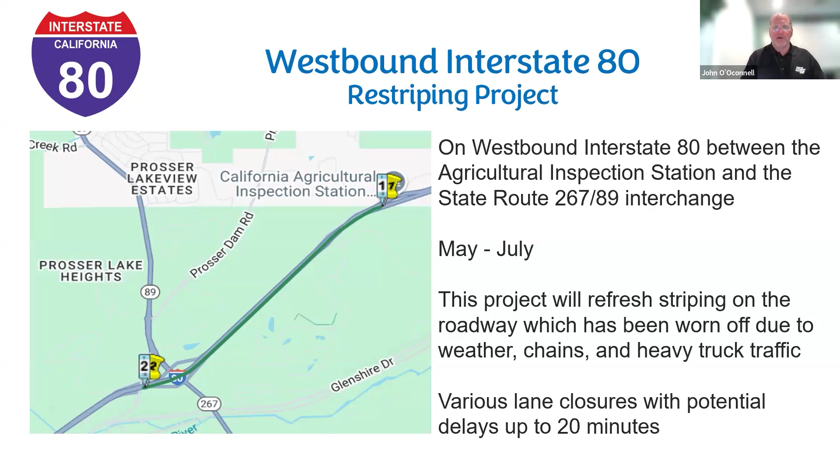All right, go ahead Jeremy, go to the next one. Okay, so let's go over to the Tahoe Basin now, where all the action is, especially Highway 28.

This will be kind of the star of the show this year: the Middle Mile Broadband Project, which started last year and is going to finish up this summer. In fact, they just started today with some prep work for it, so you might see them out there today and throughout this week.

This is Teichert Construction doing this work, part of a statewide initiative bringing high-speed internet into more rural communities. A lot of rural state highways are dealing with this this summer, so it's not just Tahoe. This project runs between Tahoe City and 267 in Kings Beach, but it's actually going to go all the way to the state line, which is the next slide.

This is starting now, about 50% done. They're working in the eastbound direction, and there'll be multiple locations with potential delays of up to 30 minutes. If you experienced it last summer, it's going to happen again this summer, same kind of thing.

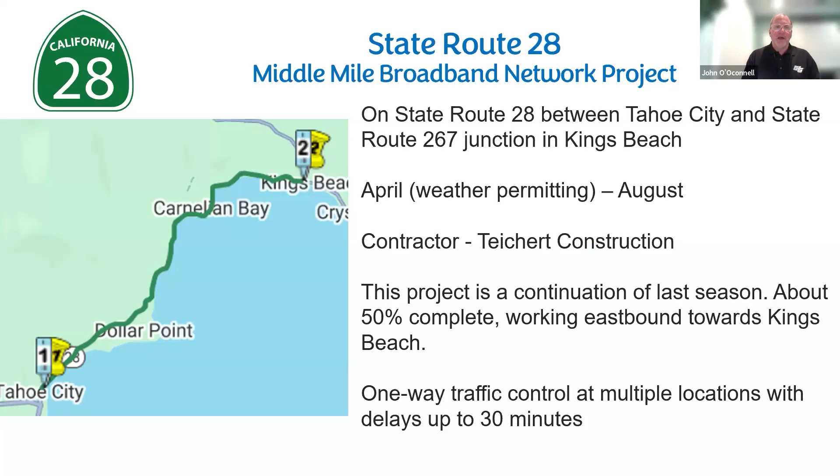This is the continuation of it, with a different contractor, which is why I separated them. This is Arcadian. It's going to pick it up from 267 in Kings Beach and go to Crystal Bay at the state line, just that small section. They haven't started this yet, so they're probably going to start early May and go to August.

This is always weather permitting too. If we get some freak snowstorm, that's going to halt things a little bit, or if we get thunderstorms, as we often do in the spring and summer up there. But it's supposed to start early May and go to the state line, with traffic control at various locations and potential delays of up to 30 minutes depending on the time of day and how much traffic there is.

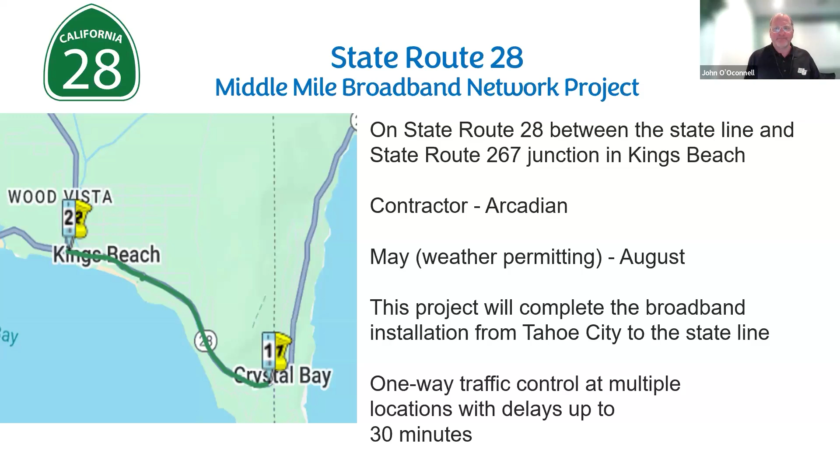All right, the one we've all been waiting for. Once the broadband is done, we are going to start basically repaving 28 from one end to the other, from Tahoe City to Kings Beach, all the way to the state line. This is supposed to start early May, so this will come behind the broadband.

The section in Tahoe City is going to be, I'm not going to sugarcoat it, a pain, because we have to dig it out all the way — the road is so damaged that we have to do what are called complete dig-outs, all the way down to the very foundation, the dirt, and rebuild the highway from the bottom up, just in Tahoe City.

We're going to do that in various sections, so it won't all be going on at the same time. This is going to start early May as well, and we're hoping to do the Tahoe City part first before the tourism season really gets going. So Tahoe City is going to be kind of rough come May, Memorial Day into June, hopefully out of there by the end of June.

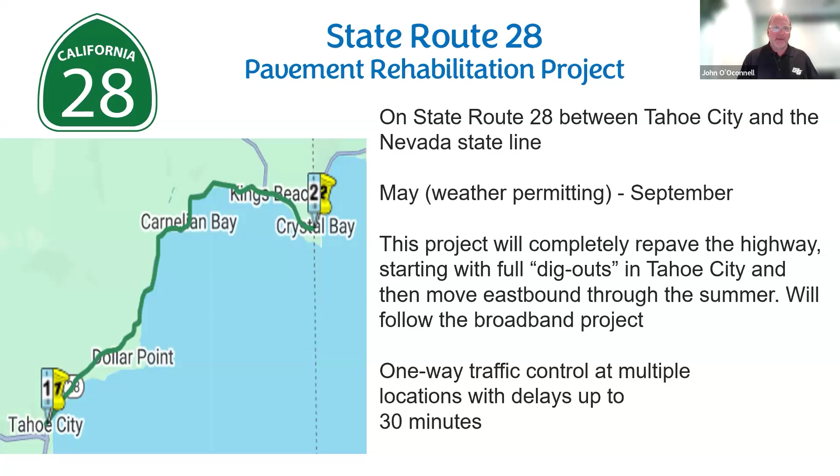That's the goal. The rest of 28 will just be a simple mill and overlay repave from there out to the state line. Tahoe City is the most complex spot, not just because of what we're doing, but because of all the shops, restaurants, and businesses there. I'll get to more details of how you guys can keep up with that, but expect delays — it's going to be kind of messy, to be honest, for about six weeks in Tahoe City.

This is going to start, I think, next week, again weather permitting, and go as long as they can before it starts snowing next winter, so through November, and then pick it up again in '26 — high-speed internet along the West Shore. Again, potential traffic control delays of up to 30 minutes.

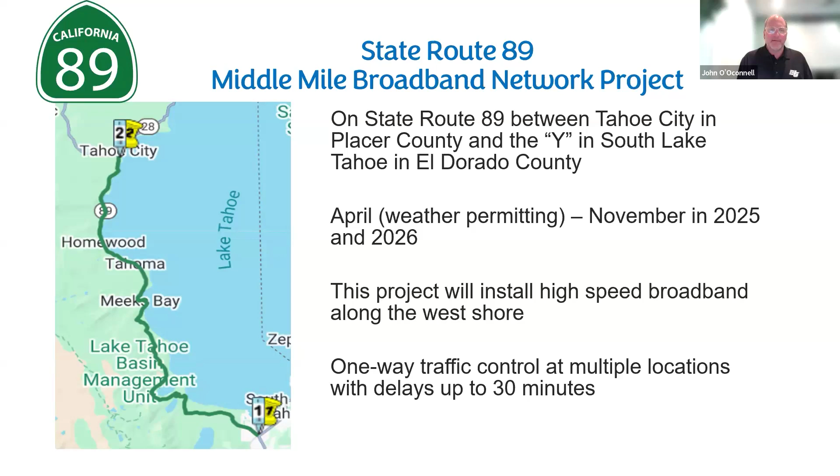And it's also going north. So this is out of Truckee going north up to Sierra County. Same routine, potential 30-minute delays in various spots, going all the way up to the Plumas County line, starting next week, and then going through the summer and fall, and then picking up again next year.

This part of 89 is not as heavily traveled as the Tahoe Basin, so hopefully traffic will not be as bad or as affected on this route because it's a little more rural, and it's not the Tahoe Basin. All right, go ahead and go to the next one.

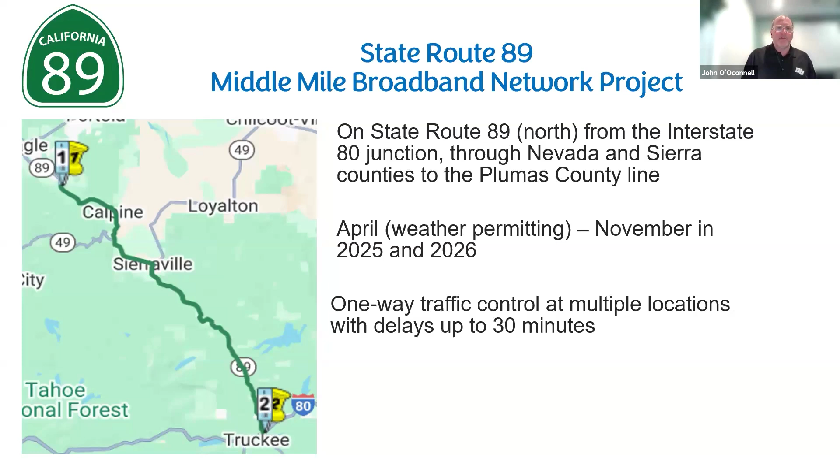All right, back to Tahoe City. There's another major project that's going to be occurring later this summer, and we are going to replace the Fanny Bridge, which I believe is about 100 years old. So just the bridge there across the river is going to get basically rebuilt.

Prep work will start in June. So a lot of the pilings and all this stuff underneath the bridge will get done first. So that won't affect traffic. But the full closure is expected to begin August 11th. That's what it's scheduled for as of now. It'll be about 12 weeks. So end of summer, kind of towards the tag end of tourism season, this is when this will start.

And traffic will be shifted over to the new-ish Lake Boulevard bypass. Hopefully this will not be as traffic interfering as the paving project, because people can simply take that other way around there. But probably the first week will be a little rough because people may not be aware, that's why we're doing outreach to try and get the word out. But some people probably won't know what's going on. But you can take that bypass up to Truckee or take it to 28 and go to Kings Beach, Tahoe Vista from there. And just the bridge will be closed.

So the transit center will remain open. All the businesses, the Bridge Tender restaurant, all that will remain open. The pedestrian path across the dam will be open, so you can still walk across that way if you want to. It's just the highway bridge itself, just that short thing, that will be closed for 12 weeks. We hope to get it done by the 1st of November, Halloween, around there, before winter sets in.

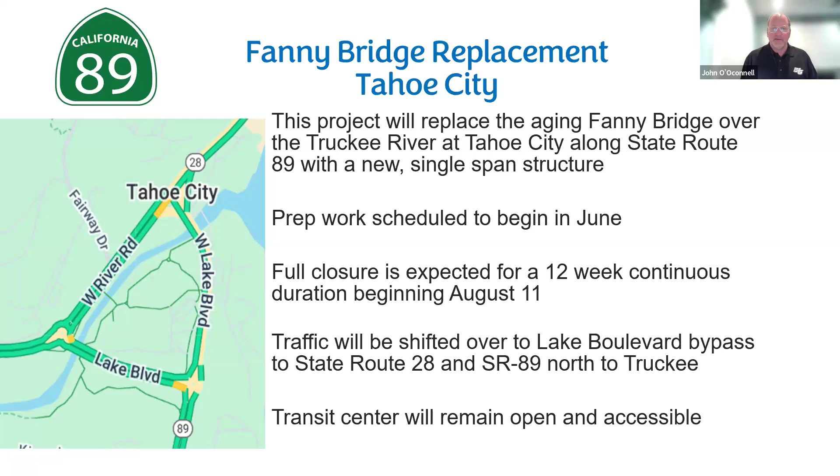So we all know that quite a few people traverse back and forth across eastern and western Placer County. Interstate 80 is the one main artery that's critical, not only for recreational traffic, but for commercial traffic as well. So we're reminding people about some of the larger projects we have going on right now. If you were keeping an eye on the weekly traffic alerts our office was sending out last year, you're probably going to be very familiar with these, because these projects are continuing from last season.

The first one heading west from the Tahoe Basin is going to be the Soda Springs Pavement Rehabilitation Project. That's stretching both eastbound and westbound I-80 between Troy and Soda Springs. It's expected to pick back up this season sometime later, either this month or early May. They are still seeing a little bit of snow melt in the area, and of course, being that close to Donner Summit, you still have that potential of a late season storm, so we're keeping an eye on that weather forecast.

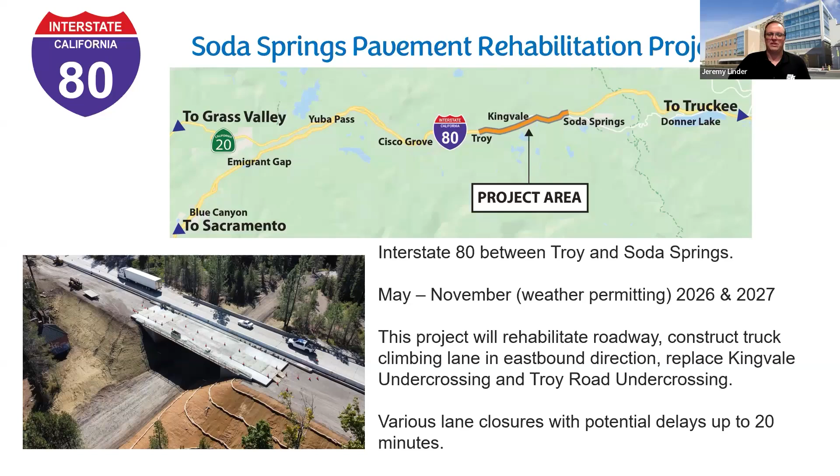The big one that started up last week, it's been in the news headlines, and ultimately what we're trying to get the word out the most about is the Yuba Pass Separation Overhead Bridge Project. That's right there, Interstate 80 between Yuba Gap and the junction of State Route 20.

We started, and currently we are seeing delays along eastbound 80 only through this stretch, upwards to about an hour. So it's currently down to just a single lane on this span till about the end of Thursday. From there, crews are constructing what's called a crossover. So once that crossover goes in place, all of that eastbound traffic will get shifted over into the westbound lanes. We'll have 2 lanes both directions running on a single span of the bridge, because this is the spot where the bridge separates into 2 different spans.

We'll have that crossover in place this season while crews work to demolish and rebuild the eastbound span, get things back in order, take a break again for winter, and then we are expected to come back the following season in 2027 and do the same thing again, this time on the westbound side.

The nice thing is once that crossover traffic gets into place later this week, that delay of upwards to an hour should get mitigated. We should go back to near normal. The traffic speed is reduced down to 55 miles per hour throughout the construction site, so you might have a few slowdowns, but shouldn't be anywhere near that 1 hour delay that some motorists have been experiencing right now.

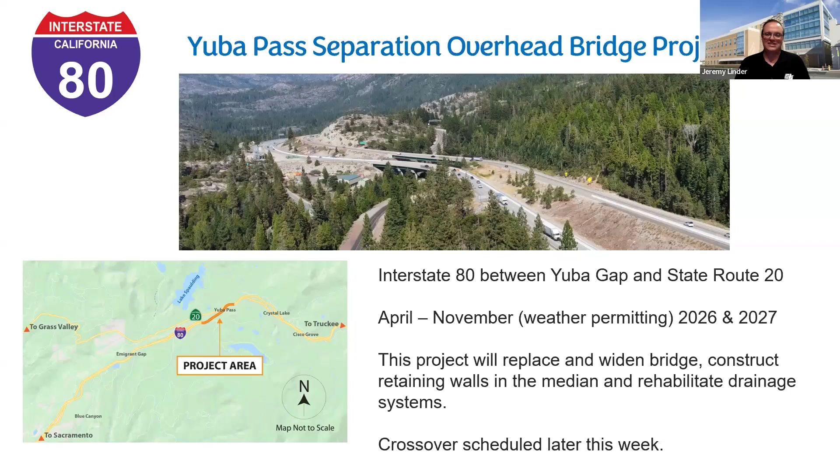We're anticipating that switch late Thursday night, possibly early Friday morning, if the contractor needs a little bit more work. So we can start replacing that bridge, which is ultimately the reason why we're doing it, is so the new bridges that we're putting in will be able to withstand heavier loads. We increase the load capacity that will be allowed for Interstate 80, which is really good for those heavy load, permitted traffics. I-80 being a main artery for commercial goods, it was very important that we be able to keep that up to date and withstand those heavier loads to move goods in and out of the state and even further west towards the Bay Area.

The last main project along Interstate 80 is going to be the Monte Vista Pavement Rehabilitation Project. This is stretching near the Alta area, between Dutch Flat, Monte Vista, and Drum Forebay. It also kicked off just about a week ago. We're continuing work from last season to rehabilitate the roadway, also constructing a truck climbing lane in this section in the eastbound direction and upgrading the median barrier.

This one is a little bit more interesting because of the way it weaves in and out with the topography. We do have various lane closures in place and traffic shifts where, if the keen eye is paying attention, you may notice at one point you could be traveling in what was the center divide, and then at one point you're back to the normal lanes, and that goes back and forth whether you're in the eastbound or westbound lane. So you'll notice those various shifts, and that was all our crew utilizing what space was available to construct that eastbound lane.

So you'll have a slightly different variation than someone might be used to. Still most of the work is behind temporary K-rail, but you could potentially see some delays up to about 20 minutes with this project. The good news is these are the three large projects for Interstate 80. We mentioned the restripe westbound in the Truckee area as well. There is no emergency work, so unlike last year where we were seeing delays up to 2 hours for the entire corridor, it should be much more manageable this year.

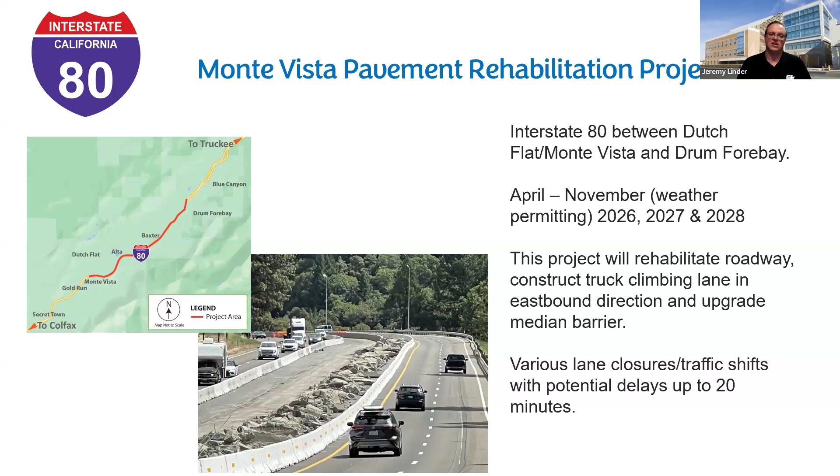Collectively, if you go through all three projects, you should hopefully not experience delays near that 1 hour mark. You may get close depending on traffic volumes, but all three contractors are working very closely with one another to try to mitigate that, especially for the weekend traffic that goes in and out of the Tahoe area all season long. Which ultimately brings us to the conclusion of our presentation.

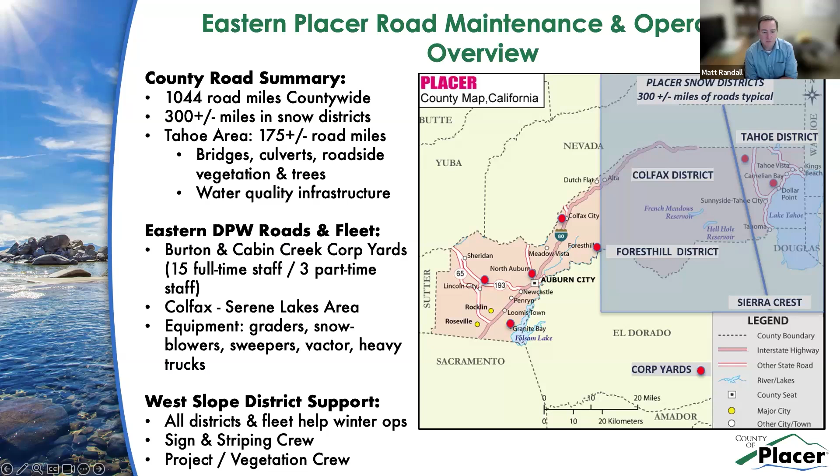So let's go to the next slide. One of the things we make sure in the summer with our snow removal operations is that we're fully staffed, and we are. And then we also have a lot of training initiatives because, while a lot of the snow removal is kind of on the job training, we do things in the summer to make sure all of our operators know how to operate the equipment.

Roads in Tahoe also look a lot different with snow. So, especially for the folks that are not up here all the time, we bring people who plow from the west side of the county up to help our Tahoe crews, just to get familiar with the roads too. Another thing that's ongoing all through the summer and through the year is our equipment asset management.

We have an equipment replacement plan that kind of guides a lot of our decisions, but we're repairing equipment, and then also we get a lot of new equipment delivered during the summer as well, including one that came last summer, that push plow is what we would call it, but it's got a snow plow and a sander there, kind of in the middle of your screen.

And then one we're expecting - 2 years ago, the Board of Supervisors, we have regular funding that we use to replace all of our equipment, but there was some additional funding that the board dedicated to equipment replacement. And one of the things we bought was a new blower. So we've got a new huge high-powered blower that's going to be delivered this summer as well. So looking forward to that.

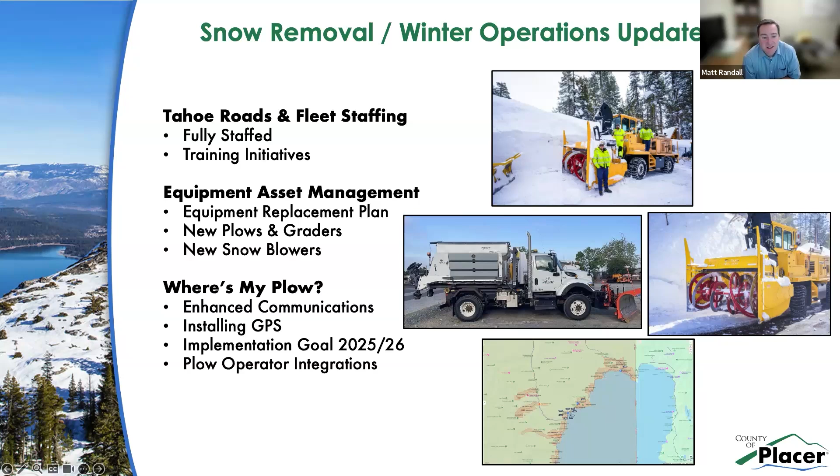The other thing that we're working on too is a countywide pavement program update. One of the things we do in road maintenance, we are always doing inspections, but actually this year we're upping our game. We're working with a firm to do mobile pavement inspections. So if you see, I don't know if it'll look exactly like that gray Ford, but something like that driving around the Tahoe area, you'll know that they're doing pavement inspections.

And if you look at the lower right-hand side, I think everybody knows what poor pavement that needs work looks like, but those are some examples. And that's what we're looking at with these trucks, trying to quantify all that and really update all of our road assets so that we can actually discuss investment strategies and goals ultimately. And kind of the biggest thing we want to wrap our arms around is this thing, the pavement condition index.

Pavement condition index is what most or all agencies use to determine the health of their pavement. It's a scale of 0 to 100 - the higher the score, the better the pavement. Zero means really poor pavement that needs reconstruction. Our countywide pavement condition index is 58, which is in the middle. Compared to other agencies, we're not the worst, but not the best either. The idea is to wrap our arms around where we stand with pavement and have a discussion about investments.

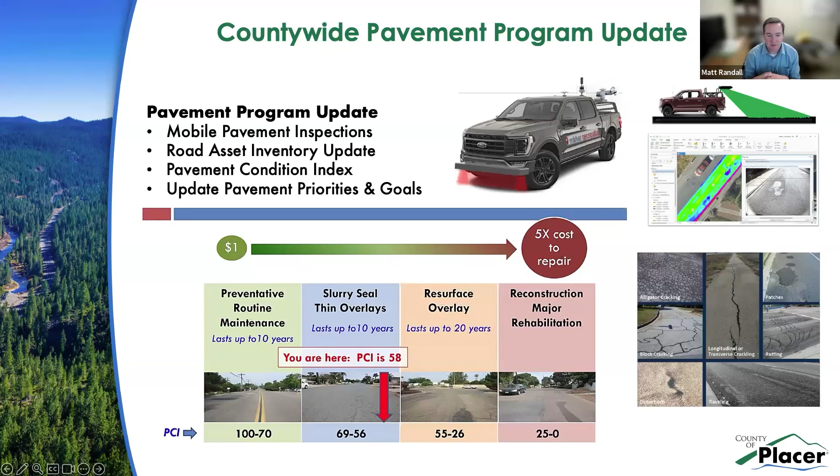So this summer we're collecting the data, and by the end of the year we should have some things to share, as well as some scenarios to talk about regarding investments.

So let's go to the next slide.

With this summer's road maintenance plan, one thing we've done the last couple years at all the higher elevations is targeted work. We always do routine patching, but we have our own paver and contracts to do dig outs, as was mentioned in the Caltrans presentation. We'll do focused dig outs on areas with the worst pavement - we're still finalizing our plan. If you want to call in some bad pavement, you can call 530-745-7565, that's our main road line. We'll be doing dig out repairs focused on specific areas all over the Tahoe area.

We also have annual pavement maintenance contracts. Some are surface treatments like slurries, and another major contract is overlays that we do countywide. We have an overlay planned on the West Shore for Alpine Way and Holly Road planned for the summer, so that will be happening as well.

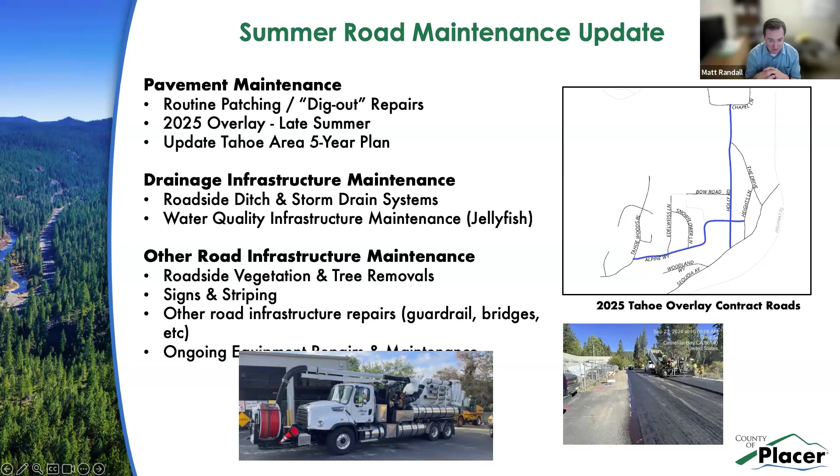So with that, I think we can go to the next slide. I'm going to hand it off to Seth Warren, our engineering manager in the Tahoe Engineering Division, to kick us off on projects.

Thanks, Matt. So as Matt mentioned, I'm Seth Warren. I'm in our Tahoe Engineering Division, located in Kings Beach. We wanted to speak about a number of our projects going to construction this summer, as well as those in the planning stages, and some of our programs, including our parking management program. We'll have Andy speak to our first project, which is our next slide, as he's leading that project. Next slide, please.

Thanks, Seth and Matt. First, like Seth said, we're going to talk about the Grove Street signal. This is at the Grove Street intersection in Tahoe City. There's going to be a lot of activity in Tahoe City this summer, although this particular portion of the project shouldn't present too many delays to traffic. Basically, this intersection is going to be signalized, but full construction won't likely happen until 2026.

What we're planning for summer 2025 is to put some underground infrastructure in place, basically some conduits under the highway, before Caltrans does their full paving project, so that we won't have to cut into the new pavement in 2026 to put in that conduit.

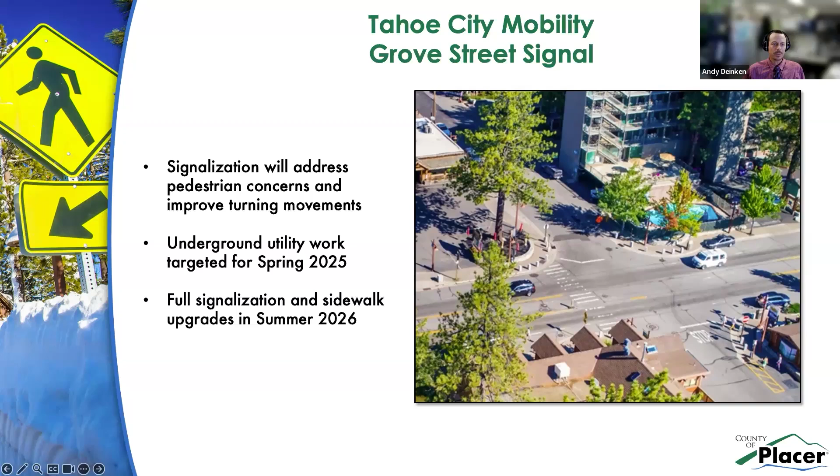We can go to the next slide now. And I'll piggyback on what Andy said, just to state that we want to get that conduit installed this summer so we can minimize traffic impacts on the locals there in Tahoe City. We would install a conduit as part of Caltrans' deep lift pavement replacement there. And then we would need to come back and cut through that intersection again next year, right through 28. We'd just be on some side streets, so hopefully mitigating some of those impacts.

Fanny Bridge - I appreciate John with Caltrans speaking to this project. I'll talk about some of the benefits, so hopefully people will be excited about it. It's an FHWA-led project, with Placer County, TRPA, and TCPUD as funding partners. As you look at this image from the south side, looking north - as John mentioned, site construction is going to start in June of 2025. One of the benefits of this project is that it'll be a single span.

The existing bridge is a multi-span bridge with piers in the river. As part of the bridge construction this summer, they're going to remove those piers, opening up the river. There will also be sidewalks and bike lanes on both sides of the bridge. In the existing condition, there's only a single sidewalk on the east side, and I don't believe there's any bike lanes - just about a 1.5 foot wide shoulder. There'll also be pedestrian crossings on the north and south sides.

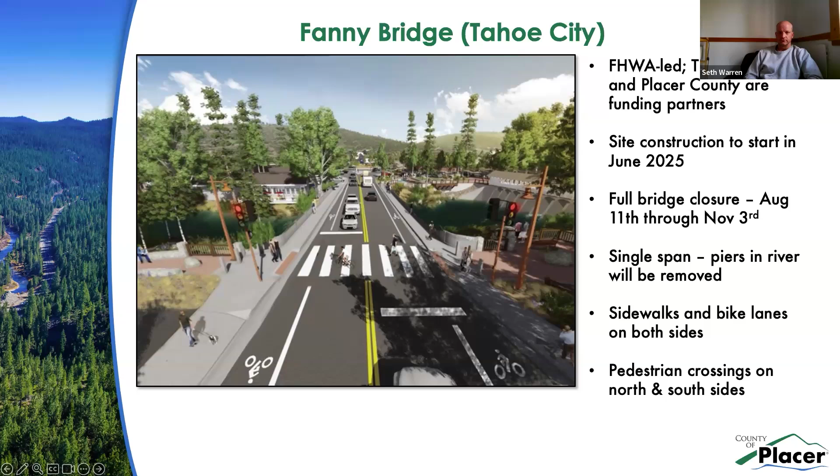All right, Lower Sawtooth Trailhead. This project area is located in Truckee, in the Sierra Meadows Ponderosa Palisades neighborhood off of Thelin Drive. It's an existing access point for Forest Road 06, which is a popular mountain biking area - I like to use it to drive out to Big Chief, do some rock climbing. It's the first site we will be developing or constructing as part of our North Tahoe Recreational Access Plan.

On the left side, you see a kind of small pixelated map, but you can see some text is in yellow and some is in green. The yellow sites are our first priority or first tier construction areas where we're planning improvements as part of this North Tahoe Recreational Access Plan. The star at the top of the image is where the Lower Sawtooth Trailhead is located.

We're intending to go to construction and hopefully have it up before it gets busy out there, so our construction is scheduled for May 2025. It's being constructed using funding from the TOT TBID Dollars at Work program, as part of an NTCA approval of TOT dollars that's also approved by our Board of Supervisors. The intent of the project is not only to reduce sediment runoff from the existing condition - you can see in this image on the right there's a narrow 12-foot wide drive aisle that runs through the site, with dirt parking areas on the east and west side.

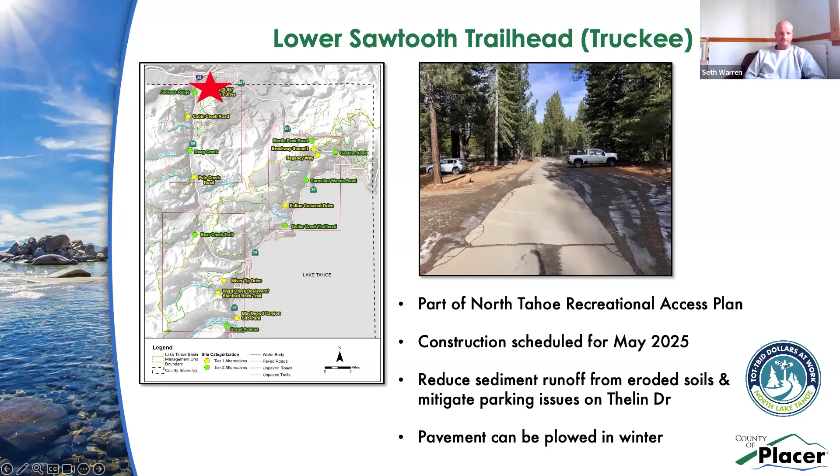I'll turn it over to Zario. Thank you, Seth. I've been assisting with the parking management program for East Placer with consultation from Dixon Resources. I'm going to quickly go over this summer's parking plan for Kings Beach. The objectives are to improve turnover and compliance in the time-limited parking spaces along the Kings Beach commercial core, including the 15-minute and 2-hour parking locations. The new automatic license plate recognition equipment will be used to track and gather turnover data, and will also be used to enforce these time zones. In addition, the paid parking program will continue in the Kings Beach Christmas tree parking lot and has now been expanded to the Brook Avenue parking lot. Finally, a diverse and open stakeholder group is being created for future discussions about the parking program. Thank you.

Thanks, Zario. Now we're moving back to another capital improvement project: segment 1 of the North Tahoe Trail. The North Tahoe Trail is the overall effort to provide a paved path from Kings Beach all the way over to Tahoe City. On the map here, the green areas are paved path that already exists. We have 3 segments left to complete this open section between Tahoe Vista and Dollar Point.

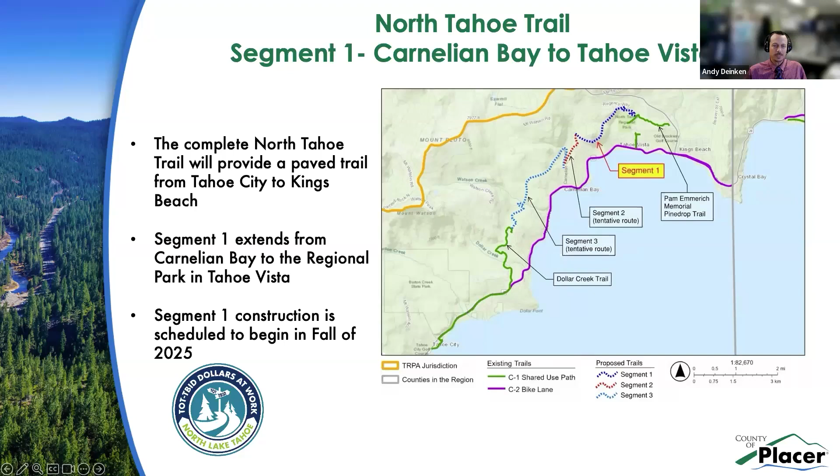This particular project won't start until the fall of this construction season. We expect to do some tree removal and rough site grading, with paving and completion operations happening in 2026. This project shouldn't present much imposition on drive times - most North Tahoe residents and visitors won't really notice it's going on since it's back up in the woods. But we wanted to let everyone know we're moving forward with it. This is another project funded by TOT, TBID dollars, as directed by the North Tahoe Community Alliance. We really appreciate them recognizing the value of this project and routing funding this way. Excited to get this one moving.

So you can go to the dog park. Well, it's eventually going to be a skate park, but the ball fields are there. You can also go down to the lake and visit some of those other recreational destinations in the area.

This project also includes a public restroom and a paved path, which will go from Grove Street and head on down to the southwest over to the Tahoe City Lodge property.

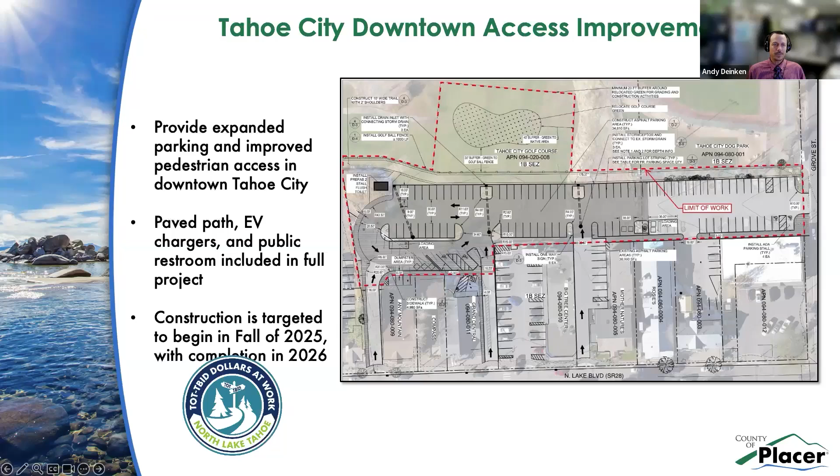With that, I think we can move to the last slide, and I'll pass it back over to Seth. Sure, thanks Andy. So this is the State Route 89 and State Route 267 Transit Priority Lane project.

Recently, we presented the Strategic Implementation and Phasing Plan to the Board of Supervisors on April 1st during their Tahoe meeting. You may have heard that due to our big snowstorm, it was held in Auburn, but we were presented up in Tahoe, and we hope a lot of you had the chance to either watch or come and attend. It was a great presentation.